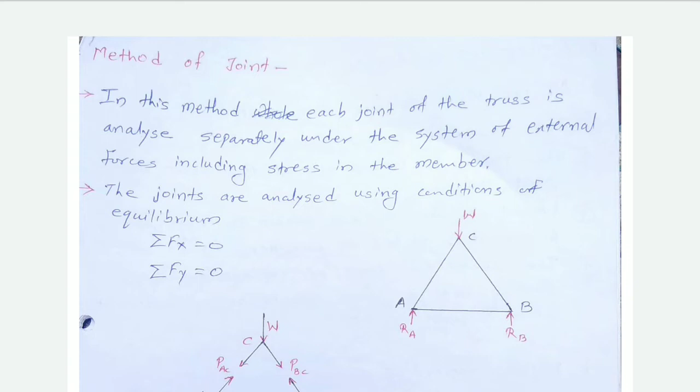So how can we classify or analyze these joints? Each joint of the truss is analyzed separately under the system of external forces. Two types: one is the external force and one is the internal stress. So under the system of external forces, including stresses in the member, joints are analyzed using the conditions of equilibrium, that is summation of F of x is equal to 0, and summation of F of y is equal to 0.

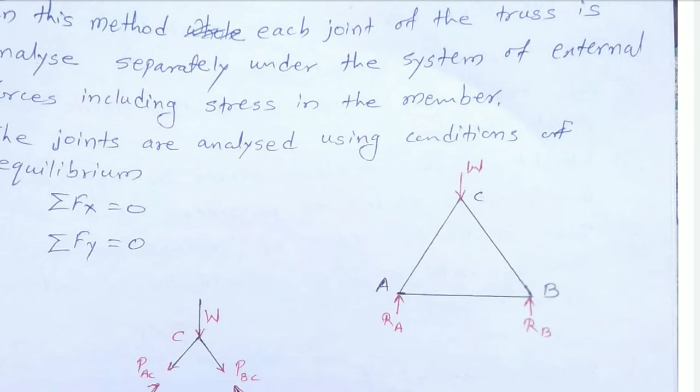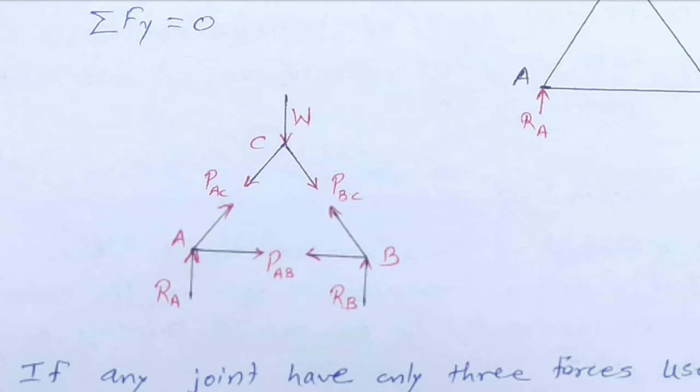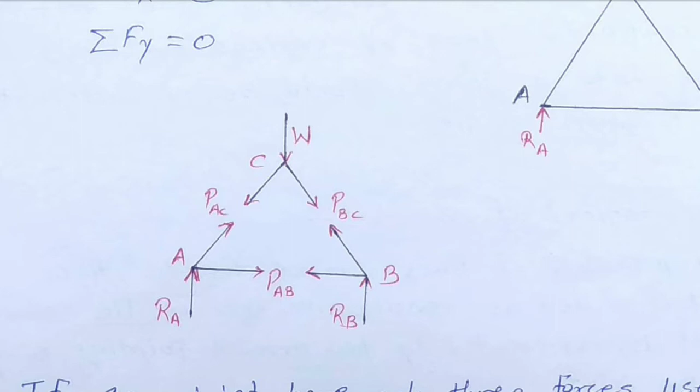So we will see the figure, that is A, B, C having load, point load W, and Ra and Rb are the forces from the bottom. How can we analyze this? These are all separate analyses. Between point A and point C there is a force PAC, between point A and point B there is force PAB - these are only for the notations. And from point C to point B it is PBC. The remaining are already there: W, Ra and Rb.

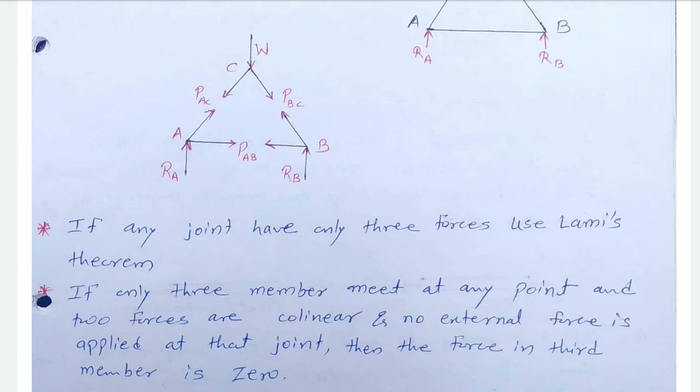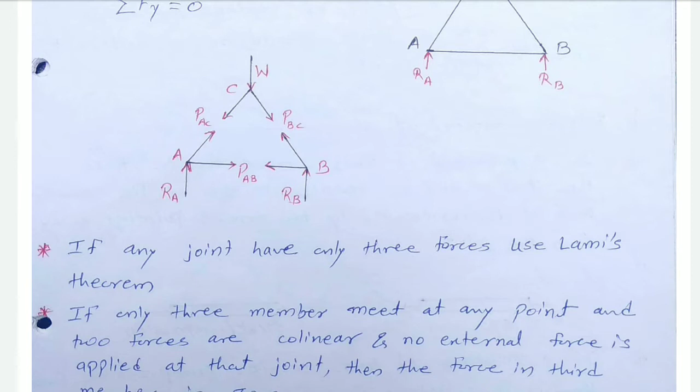Let's see the conditions. If any joint has only three forces, we have to use Lami's theorem, which we studied in unit number 1. If only three members meet at a point and two of them are collinear, and no external force is applied at that point, then the force in the third member will be 0.

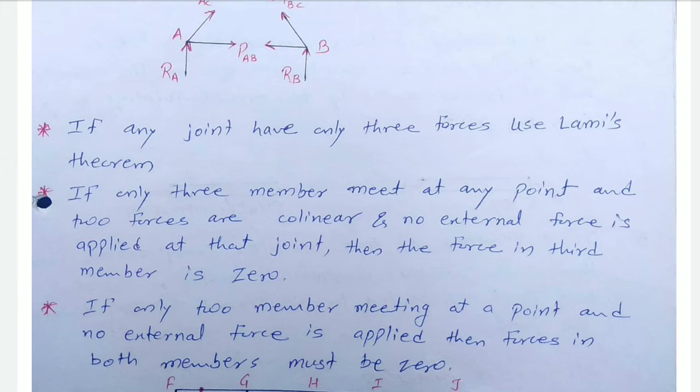Again, if only two members meet at a point and no external force is applied, external force plays an important role here - if no external force is applied and only two members meet at a particular pin joint, then both members carry 0 force, or the forces in both members must be 0.

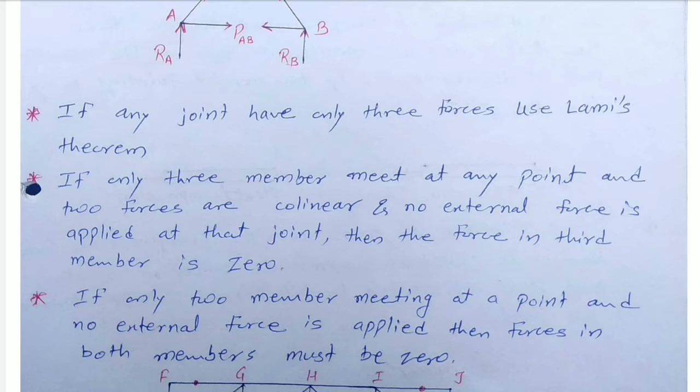Let's explain this with a diagram. Here we can see this diagram having joints A, C, D, E, B, and upper joints F, G, H, I, J. At point A there are three joints: F, G, and C. Point C also has three joints, E also three joints, B also three joints. Similarly G, H, I are three joints.

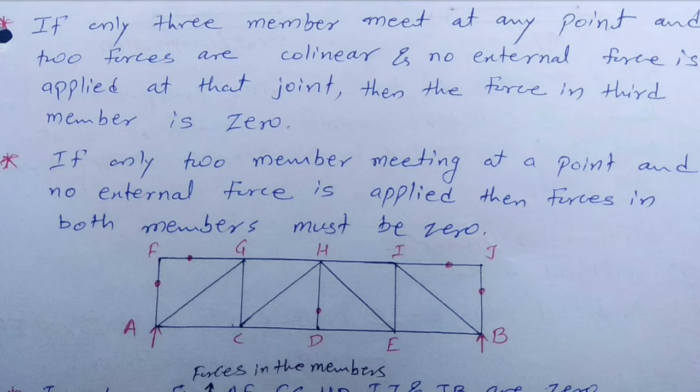Members are joining. At the remaining points F, D, and J, only two members join at that particular pin joint. So the forces AF, FG connecting point F; for point J, connecting IJ and JB; and for point D, HD - these forces are 0 or will be 0. So in the above figure, forces in members AF, FG, HD, IJ, and JB are 0.

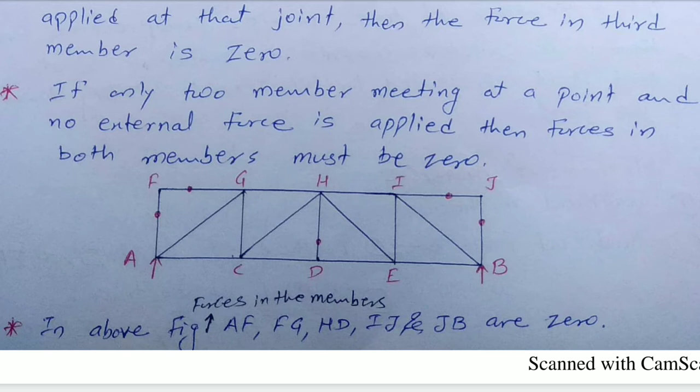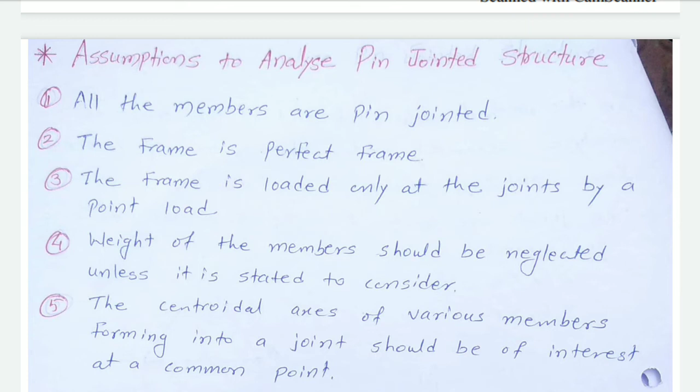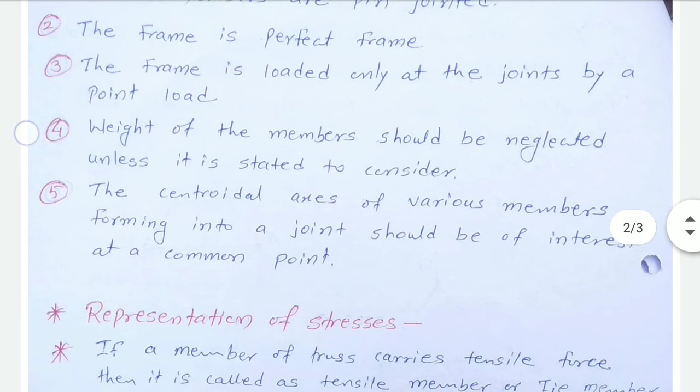Moving on to some assumptions for the pin jointed structure while solving numericals or analyzing this structure: all members are pin jointed, no other joint is applied. The frame is a perfect frame, that is M equals 2J minus 3. The frame is loaded only at the joints by a point load, meaning only point load is applied, not other loads. Weight of the member should be neglected unless stated - meaning if weight is not to be considered, it should be neglected if not stated.

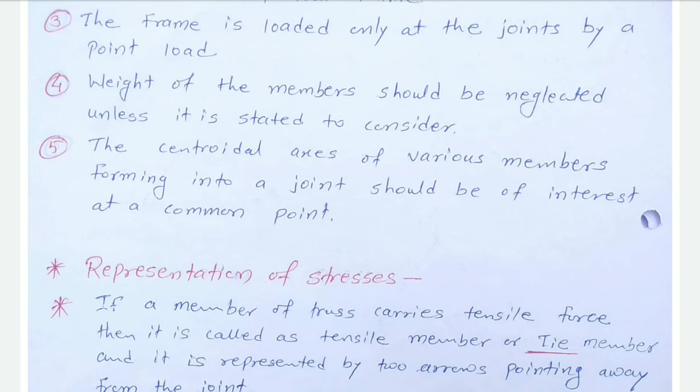So the centroidal axis of the various members forming the joint should intersect at a common point. The centroidal axis may be more than that, so it should intersect at a common point. So the representation of the stresses will be there.

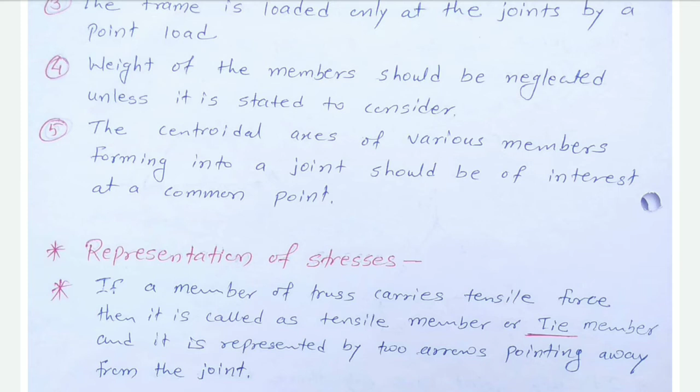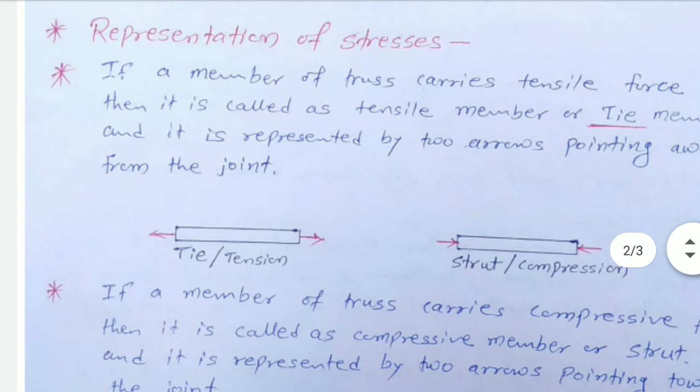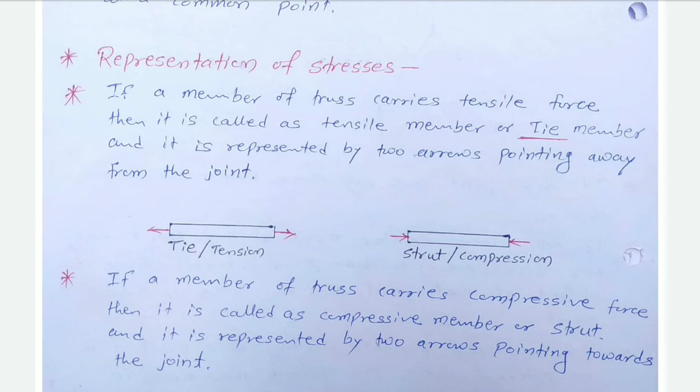The second one is exactly opposite. If the member of truss carries compressive force, it is called a compressive member or strut, and is represented by two arrows pointing towards the joint. This means compressive - if we apply pressure from the outer side, that is compression.

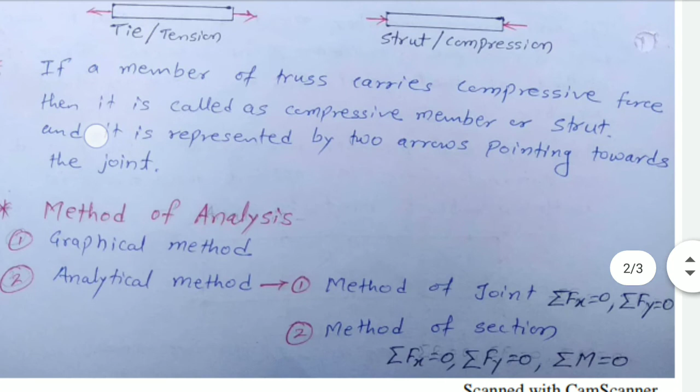So the methods for analyzing are the graphical method and analytical method. We will see the analytical method, not graphical, in this mechanics course.

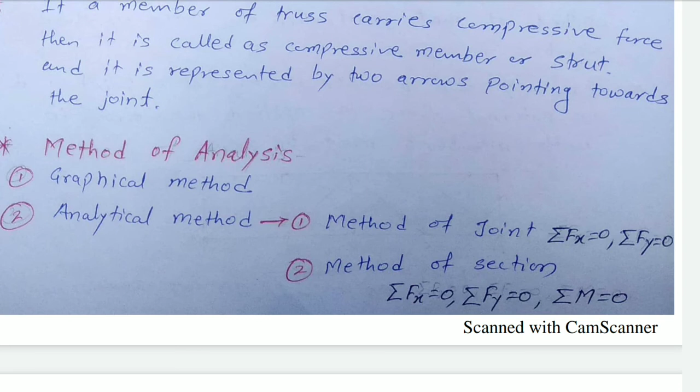So the method of joints will be there, the same as we analyze joints, that is summation of F of x is equal to 0 and summation of F of y is equal to 0. This is one of the methods.

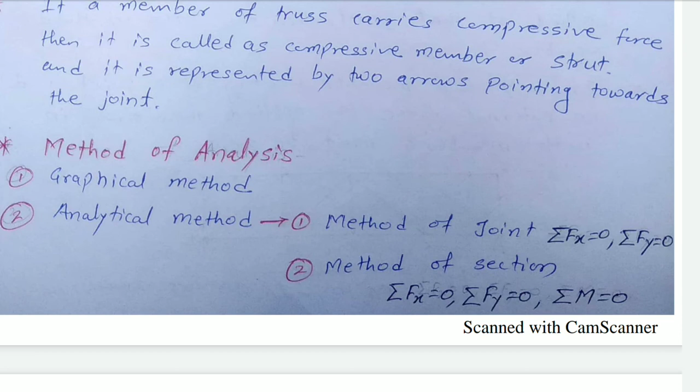The second method is the method of sections, meaning we take sections of particular frames. In this method, one thing is added: summation of moments is equal to 0. So these are the two methods for solving the numericals.

And the next one is your cable. We also require frames and trusses, but there is also the cable. A cable is a one dimensional structure which carries only axial tensile force. This is most important - the cable is only one dimensional and it carries only axial tensile force.

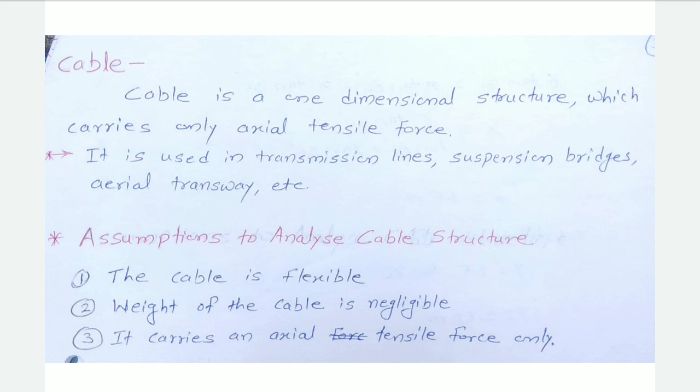It is used in transmission lines, suspension bridges, aerial tramways, etc. Meaning it is mostly used in a circular shape. So the assumptions to analyze the cable forces: we know it only carries axial tensile force. The cable is flexible, weight of the cable is negligible, and it carries an axial tensile force only if the forces are not defined - so you have to assume directly that it carries tensile force.

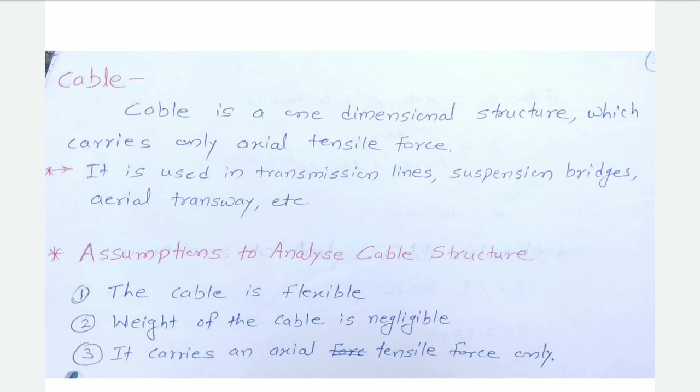So these are the assumptions and theoretical part of your analysis of stresses, the frame, and the method of joints. Thank you.